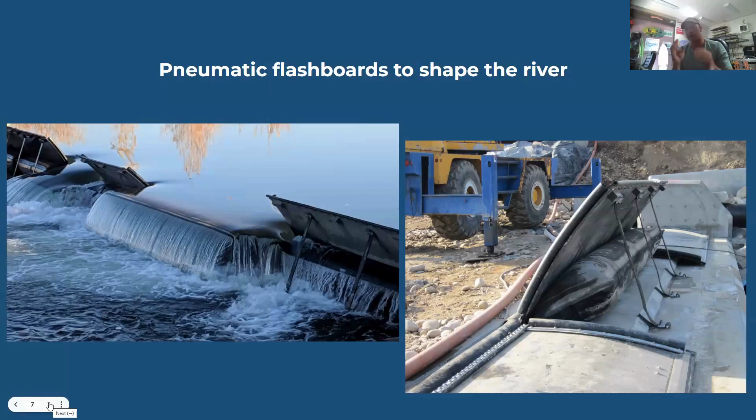Phase one of the Whitewater Park also has 2 hydraulic wave shapers, as they are called. Wave shaper 2, which I will get to shortly, is an independent hydraulic wave shaper. Wave shaper 3 is a hydraulic wave shaper attached to a pneumatic crest gate, giving a lot more opportunity for basically all sorts of range of motion. I'll get into it further when we get there. We can go to the next slide.

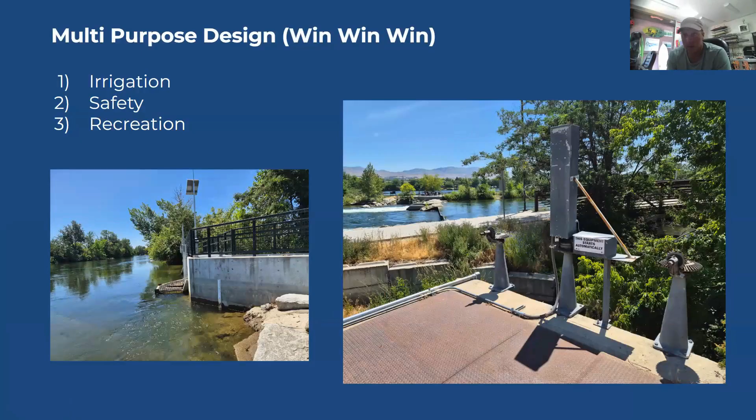And what I really want to focus on is the wins, right? So the 3 main ones that we're on here are irrigation, safety, and recreation. The first 2, depending on who you're talking to, can be interchangeable as far as priorities go, but recreation will always be the third.

This park was designed to improve and deliver water to the Thurman Mill Canal, which operates anywhere from 15 to 30 CFS throughout the year. So nothing huge, but it's very important to have the right headwater amount in order to deliver that water. So until we know that the irrigation canal is set, that it is getting the correct quantity of water requested, we can't really do anything. Once that's complete, then we can start looking into making waves.

And simultaneously, we can address safety throughout that, because there are dangerous ways to back up an irrigation head pool, and there are safe ways to do it. And these systems we operate can create both. So yeah, those are the 3 we'll be discussing.

One of these images here is just the old head gate that initially operated with phase 1 in Boise. Now that has been upgraded to the image on the left there. You can see on the outside there's a solar panel and everything. It's called a Rubicon head gate, and it gives us extremely accurate information. We can just put our set points in of what we want it to flow.

From there, our challenge still to this day, and even next week, is going to be the biggest challenge: keeping that headwater high enough while making a good recreational feature, in that our canal has been demanding more and more water as our population grows. So we have been able to meet this no problem. Working with the ditch riders has been a massive success, and that's really kind of a win-win scenario.

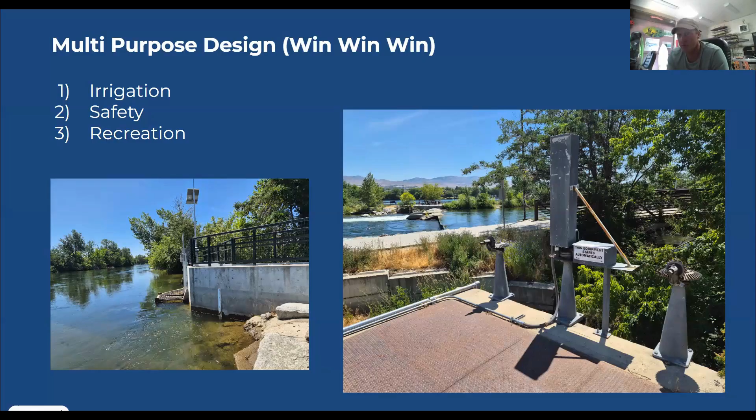Prior to what we have at phase one now was a very dangerous low head dam. If you go to the next slide, Risa, there is the image that has the backhoe in it up there, of the old Thurman Mill weir. I still work with the ditch rider who was doing this prior to this being built 12 years ago.

Maybe it's been more, and he would go out and put those 2x6s or whatever into place in dangerous flows, tied to a rope. He keeps telling me, well, it's a good thing I had that rope. And Ryan and I are like, no, you should have never had that, because that is extremely dangerous. So old school to new school, if you will. And then just a couple of other images there.

One is the one in the middle there, of the phase two Farmers Union Canal grate, which we've been getting in and cleaning off and making sure that water flows good as well. So basically, irrigation is top priority at both phases of this park. It's two different canals, and it will always be that way. But we have had no problem meeting those demands, as well as making incredible recreational features.

So some of the irrigation challenges are manual operation, debris accumulation, structural degradation, and inflexible and unreliable flow control. We can take care of all of those with this adjustable system. I won't go too far into the details there. I think a lot of people kind of already know what we're talking about on this. And then, of course, the biggest win is the removal of the low head dam. If you could go to the next slide, Risa.

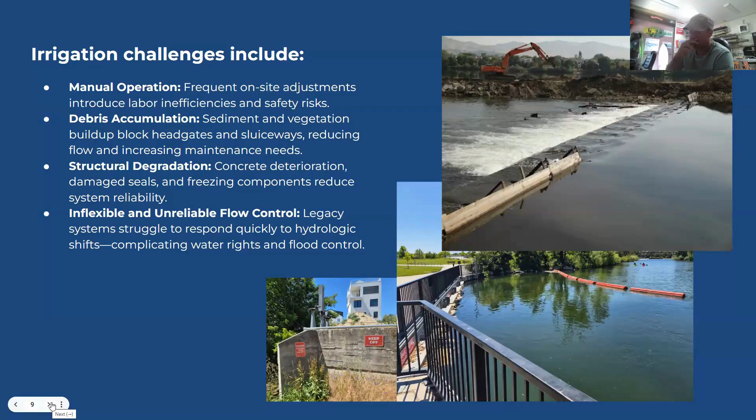Public safety. So we've addressed irrigation. We have improved that significantly. Now we're on to safety. The hazard reduction and safe access to the river. We were able to put access ramps for anybody into the river adjacent to these systems. But mainly just the low head dam removal. You can see the dangerous water there. That's actually a fairly friendly low head dam image.

And I'm sure with this audience, I don't need to explain what that is, but we were able to completely eliminate that threat. The year prior to, it may have been 2 years prior to opening of phase one, but it was very shortly, and I believe it expedited getting the project complete, there was unfortunately a drowning in the low head dam at the site of the Boise Whitewater Park before it was built. So being able to remove that is a massive win and just enhances the safety to the public, because these things are everywhere.

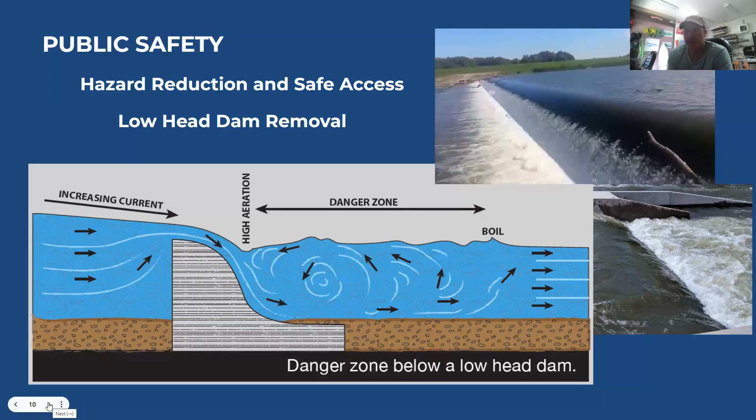I've got, what is it, 50 deaths per year of low head dams. I do think that's an underestimate. A lot of these do not get reported. But I don't think I need to tell all you guys these things are super sketchy and they got to go. So let's go to the next slide.

And so here we are, the third, of course, recreation. And we'll go into this quite a bit, because it's just been an incredible thing that the city of Boise, that I can speak for, has seen. I mean, just a massive shift in people when they're looking into a place to move or not. A lot of people have been coastal their whole lives, or surfers, or whatever it may be. We have surfing in Boise, and it's really, really fun. Looks a little bit different.

A lot of people used to the ocean are going to say, oh, well, river waves generally are a little bit smaller, but they keep going. They can be very fast. And they give you a much more ocean-like feel than you would think just by looking at them from the shore. And that's a big part of it too. I've been really lucky. So all the passion comes from the sport. I just want to surf something really good, or play boat in something really good.

And so, we put maximum attention. If a wave can be made, even though there's a lot of challenges, it must be made, right? And I kind of repeat that, and that's why we've been able to keep these things going, because there's a lot of scenarios where something is simple enough to fix, whether you have to get in the water to find what that is, or to get in the water and just simply feel the retention of the feature that you are implementing. It's a night and day difference. The surf community here in Boise will tell you they really like it when I show up to surf because the wave seems to magically get better.

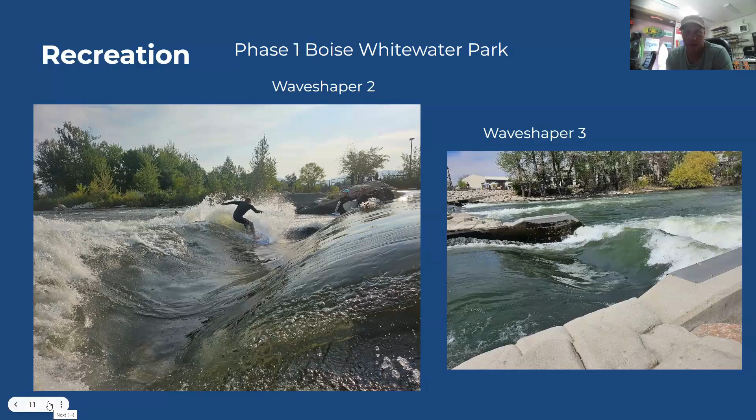And the huge bonus to it as well is that the public can really see what is going on when the surfers are on the wave much better in Wave Shaper 2, because it's not between some big hydraulic housing walls. So yeah, that's phase one, and we'll continue on. Let's go to the next slide.

And here is where I really like to show the potential of what phase one is. And I don't know of another whitewater park that has this opportunity. And again, the entire flow range, I'll repeat, of phase one is 250 CFS. We have a small winter wave where we narrow that 30-foot channel with literal plywood, and we're able to keep a wave going all winter, all the way up to 4,000 CFS.

And the main reason we stop at 4,000 is the head and tail water get too close in differential, and you kind of get flat waves at that point. But it's also the same flow that the fire department tells everyone to stay out of the river. So it would be kind of a contradiction if I invited everyone into the river at that flow point, but it seems to line up pretty well.

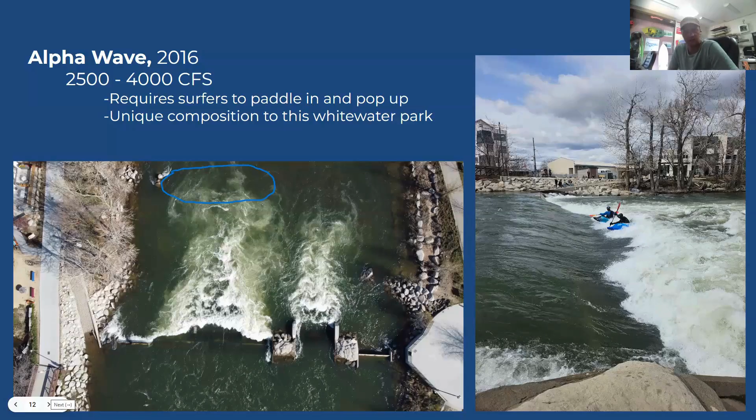But for the people who know about it and have figured out how to paddle in and pop up on a river, which can be very difficult, it's very iconic. I have some footage of it. If you go to the next slide, Lisa, it might show it a little bit better,

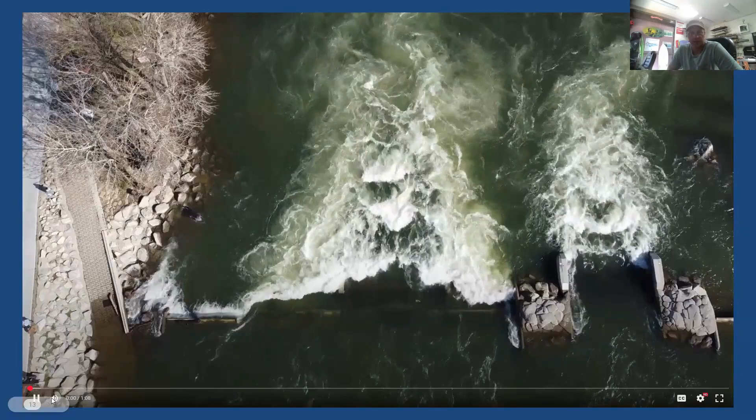unless it's lagging a little bit, which it may be doing. It is on my screen. Is it paused on yours? Oh, there it goes. So yeah, I guess the footage isn't great.

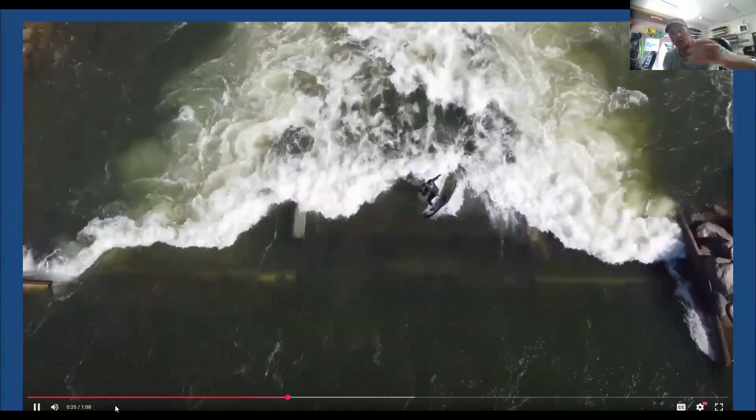It's a little choppy there, but what it initially showed was paddling in on river left there, and then you have to get over on your stomach to the middle of the wave and then pop up just as you would in the ocean. Whereas with most of these other river waves, we have all found ways to go straight to our feet and skip the paddling process. So this one you kind of have to earn, but it is very worth it.

And again, we've got a second wave on the side. This footage doesn't have a surfer in the second wave simultaneously, but I believe we've put out a reel with that footage at this flow before. So what I really want to hit home with the amazing opportunity of phase one of the Boise Whitewater Park is that flow range, 250 to 4,000 CFS.

I do not know of another whitewater park that can operate surf waves in that level of flow. And then the 250 CFS wave allowed us to surf from October all the way back to April. So we have operational waves at least probably 340 days a year. There's a few times where irrigation comes into play. We might not have enough water. We have to shut it down for a week or two, but that's about it.

So, anyways, on to phase two, and phase two opened in 2019. The amount of adjustability that we now have, especially after kind of 6 years of tuning it in and making it work. I mean, it threw an incredible wave right away, but we had stability issues with it. And that was a challenge that S2O design had in the beginning. At this point now, that has been completely mitigated, and the wave is running as we speak.

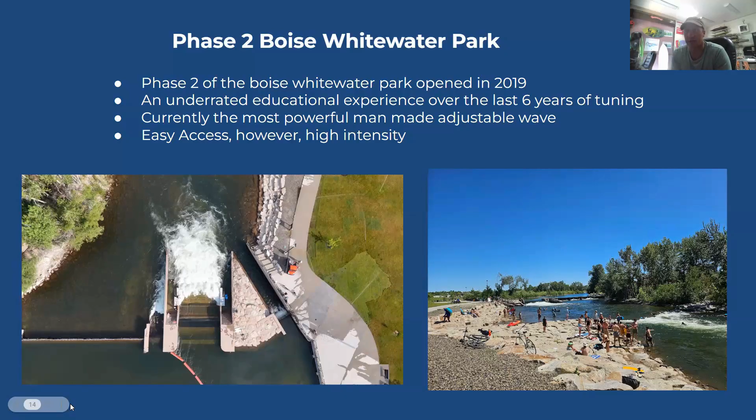Let's check out the next slide and see what we have in that. So there you can see some people boogie boarding on it. You've got surfers in line, and it's actually, as of late, become an incredible kayak feature too. Kind of always has been, but it's pretty intimidating to get your boat up on those walls and drop into it. But now we have a lot more boaters doing it.

And then on the right side there, that shows just the bypass gates on the other side of the river when it's too high for the surf wave to operate, which would be 2,500 and above. And even those were able to make a really cool feature, as you can kind of see right there. It's kind of funky, but we had a couple guys that really enjoy it. I think we called it Johnny's Wave. You can even surf on what would be surfer's right, river left side of it there. Let's go to the next slide.

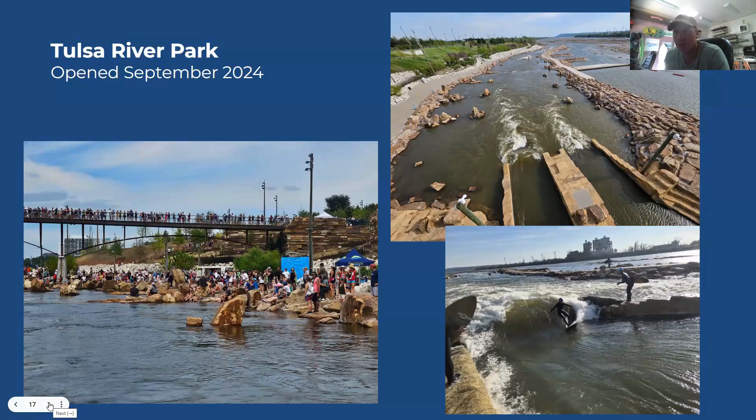Idaho Surf Association is an association out here in Boise that really wants to promote these everywhere. They just see the incredible success and fun that everybody is having here. And I highly recommend getting in touch with them if you want to know things about like user data, economic impacts, this, that, and the other. They're currently working on an economic impact study, and amazing information for other communities to get these things going in their communities. While I kind of am more on the operations side of things, I highly recommend.

So again, yeah, really appreciate everyone's time. I will let Ryan get after it, and maybe feel free to do questions whenever they're permitted. Yeah.

Okay, Ryan. All right. So again, my name is Ryan, and I'm basically going to just reiterate some of the things Paul was saying about how these types of parks, while difficult to build, can really offer wins in multiple areas. With Boise, again, we're talking about irrigation control, safety or removal of dangerous low head dams, and then also, of course, recreation. Bend is similar.

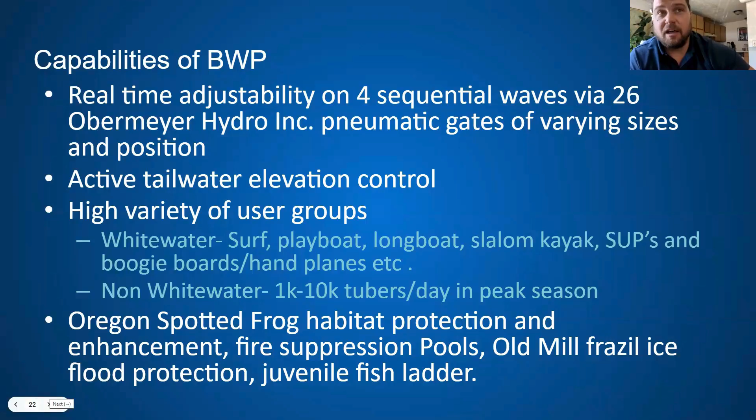As you can see, we have 4 sequential waves with gates on all of those waves for recreational purposes. All of the features have tailwater elevation control, which is very helpful when creating a wave. It's arguably the most sensitive variable that you can adjust when trying to make a feature do what you want it to do. Huge user groups that this park caters to, from surfing to play boating to whitewater supping. And we also get about 250,000, actually I think it's closer to 300,000 these days, floaters that go through the channel designated for them. Let's go to the next slide, please.

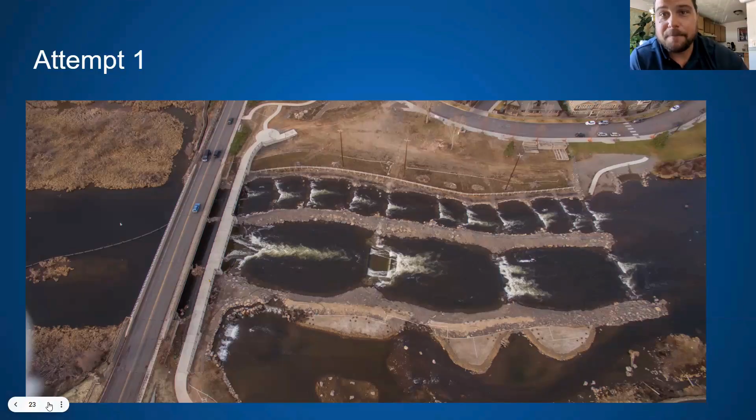And one thing that's interesting to look at on this picture, this was right after the first attempt at construction was done, and you can see how barren everything was post-construction. Hopefully we can see a contrast with some of the pictures later in this presentation that show how nicely the vegetation returned to this area. But let's go ahead and go to the next slide.

Yeah, again, just talking about incorporating these parks in the future. I mean, they are difficult to build. There's no website that you can go to that will print off a blueprint for it. It's up to these engineers and their minds to look at each site specifically and figure out the best setup that's going to provide the most recreation, the most safety.

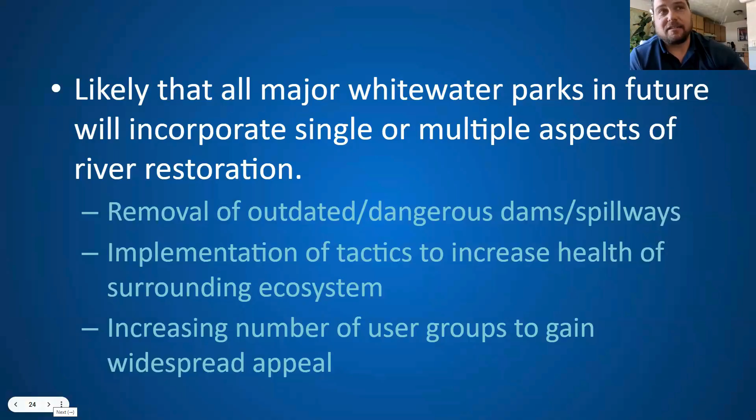And they're not easy. They typically take longer than expected to construct. With the Bend Whitewater Park, we had to go back into the water the subsequent 2 years after initial construction to really fine tune it and make it as safe and as high level of recreation as we possibly could. Let's go ahead and go to the next slide.

Here's just a couple pictures of initial construction, driving some sheet pile there in the top left. Some guys working on the gates. All of the construction we did here at this park had to be done in the winter time when the flows were lower. It just simply wouldn't have been possible at summer flows in the Deschutes River.

A couple of the groups that were involved: the Bend Paddle Trail Alliance, they were really the forerunners in getting this park built. They were working on planning and conceptual designs for at least a decade beforehand. And then they also contributed over $1 million that they were able to raise towards the park. So we're very appreciative of them.

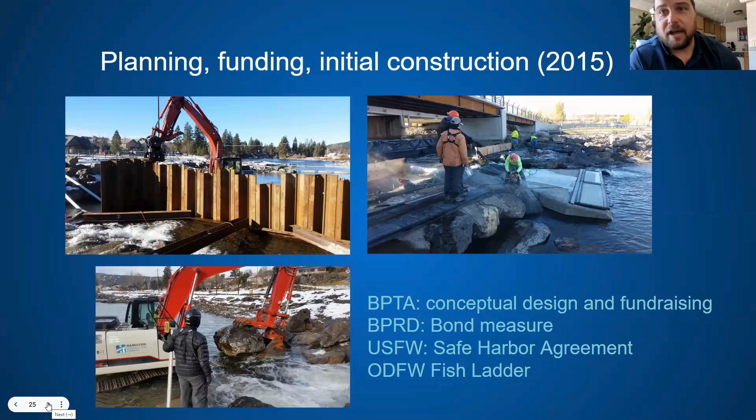Bend Park and Recreation District helped work with the bond measure that got some additional funding. And then again, U.S. Fish and Wildlife and Oregon Department of Fish and Wildlife for additional help with how to design this for the ecological benefits that the park would provide. Let's go ahead and go to the next slide, please.

River Restoration of Carbondale, Jason Carey was the main designer of the Whitewater Channel. Otak Engineering really worked on the fish ladder / floater passage. And then a couple other people that were involved, Surf Anywhere helped with the surf wave, which we'll talk about here shortly. And Boise Parks and Recreation provided me an experienced wave shaper, which is great. And we're thankful for that. Go ahead and go to the next slide.

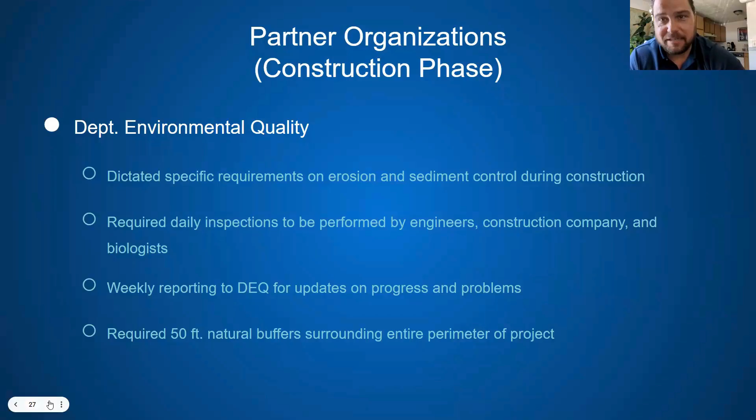And I'll just go over a few of these just to show the range of people that were needed to work with as far as permitting and getting this park built. DEQ obviously was a huge one. Lots of requirements on turbidity containment and takes and fills. We had to report to them on a weekly basis, basically during the entire construction phase. Next slide, please.

DSL, same thing, a lot of involvement with fish takes and turbidity curtains and use of equipment in the river. They require everyone to use vegetable oil in all the hydraulics and had very specific requirements on fueling the equipment in proximity to the water, which seemed tedious at the time, but I definitely appreciate it, because it could get pretty messy pretty easily if these types of requirements weren't in place. Let's go to the next slide.

Army Corps was huge. Army Corps, along with U.S. Fish and Wildlife, were probably the two main entities that we worked with the most closely. Let's go ahead and go to the next slide.

PacifiCorp Power, that was an existing hydroelectric dam that's actually downstream of the river. And something that was cool during construction with them was they were actually able to lower their headwater, which was actually our park's tailwater, and it gave us a lot more access at specific times that we needed it to accomplish some of the construction feats. Oregon State Marine Board, they were huge with signage and patrols. Let's go to the next slide.

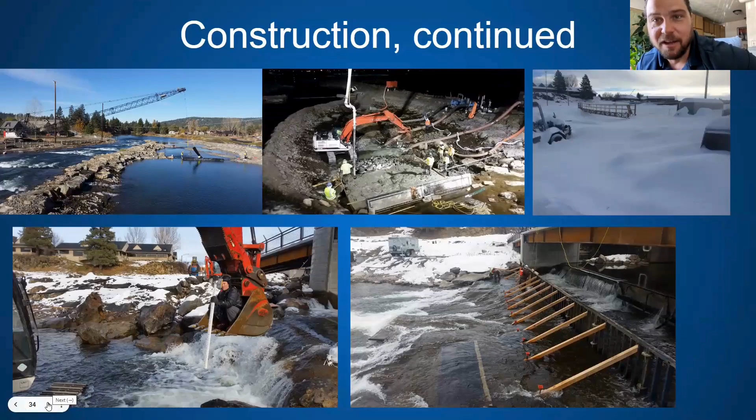So a lot of those started at 9 o'clock, 9 p.m. at night, excuse me. You can see again with the weather, there were many days out there where there was snow and ice, and it required us to go out there and just expose what we were working on to be able to continue working for the day. So quite a big project.

One of the interesting things about this park, again, because it was fairly kayak centric in the beginning, and with the Bend Paddle Trail Alliance being fairly kayak centric, the 4 waves in the center were mostly dictated towards those, but there was a promise of having more of a clean faced wave that would be more apt to surfing. But back in 2015, when these pictures were taken and the initial design of the park here, river surfing wasn't what it is today.

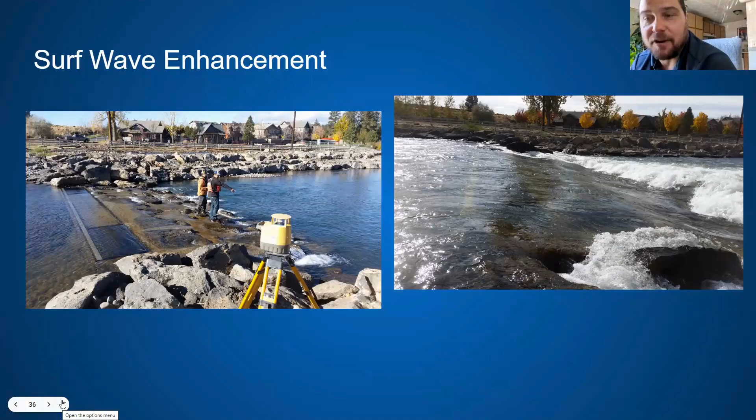So much so that even the engineer who designed it, I don't believe, was aware of what made a really good shortboard river surfing wave. So this was kind of his first attempt. And you can see on the right-hand picture there's quite a bit of whitewater on that face, which might have been okay for a kayak, but it wasn't exactly ideal for surfing.

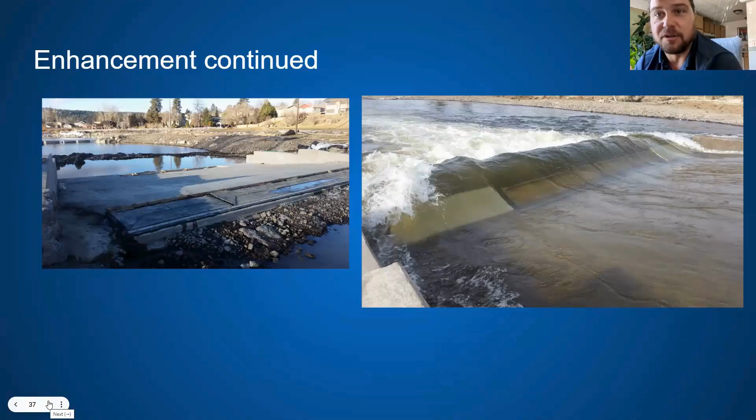So if you go to the next slide, this actually happened after the initial construction. We went back in here with the help of some other surf-oriented folks around the world to talk about some of the characteristics that make a really good surf wave, which is smooth concrete, stem walls on either side to contain the wave itself. And then, as you can see, we put flashboards under the wave to create kind of a sheet flow. And as you can see, much bigger, cleaner face, which has become a really great feature for shortboard surfing. Now we go to the next slide.

Some additional hardening. This also took place after the initial construction. We have basalt here, and it wasn't financially feasible to bring in granite, which is arguably the best type of rock to use for these parks. So initially, it was a bunch of really loosely stacked basalt that created all the groins and the channels between the islands of the park.

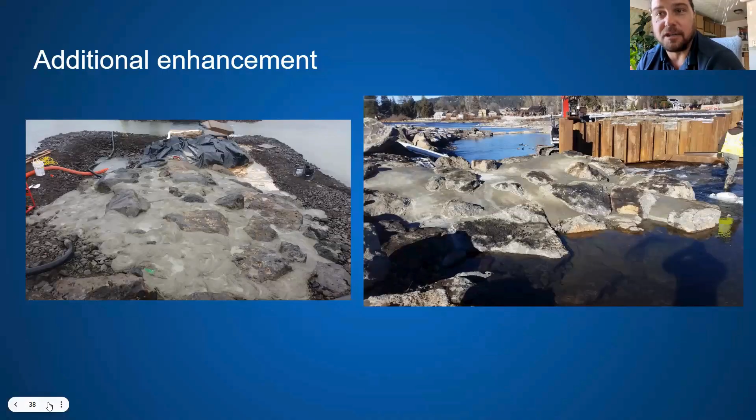And we knew right off the bat once we started throwing water through it that it was just not going to be robust enough to handle the dynamics of a wild river, but it also created a lot of sieve hazards and entrapment hazards. So one of the big things we did was going back in and injecting a bunch of this high density grout to really turn those into solid structures that would not only last longer, but also keep people from getting their hands and feet stuck between stacked rocks.

Go ahead and go. Swiftwater training in this park has become a huge resource for not only our fire department in doing training with. Again, with the adjustability, we're able to go out there and train with them and create specific scenarios that they may ask for or want to train on by diverting water and/or creating more kind of hazardous situations that they can then run scenarios through.